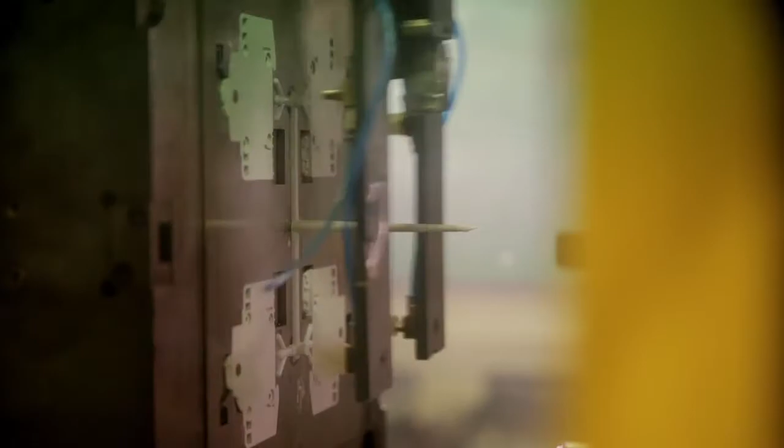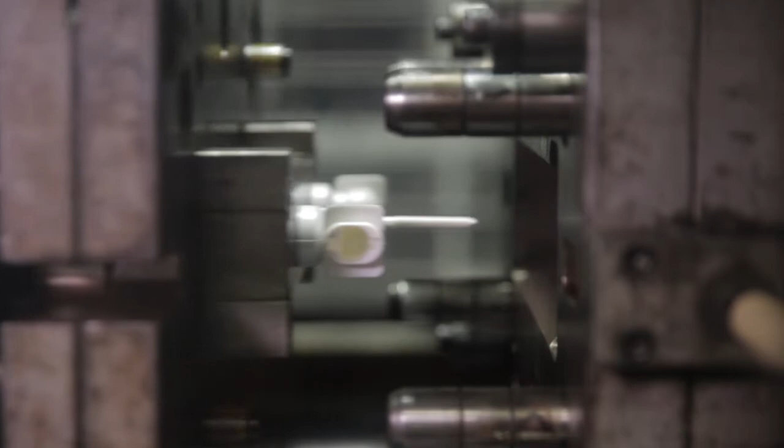General Industrial Controls, commonly known as GIC, was established 4 decades back in 1972. GIC is an ISO 9001:2008 and TS 16949 company. It manufactures world-class automation systems and injection molded plastic parts, and it has also got a world-class tooling activity.

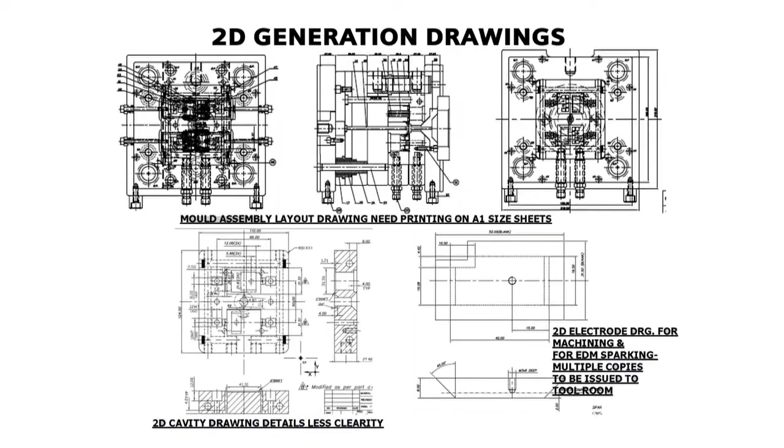In the initial years of manufacturing tools, we were using hand sketches drawn on paper, and later on, when the 2D platform came into existence, we started redrawing the sketches on 2D software on the screen. It was difficult for most of the people to understand the 3D aspects and the 3D intricacies of the mold design and the part design.

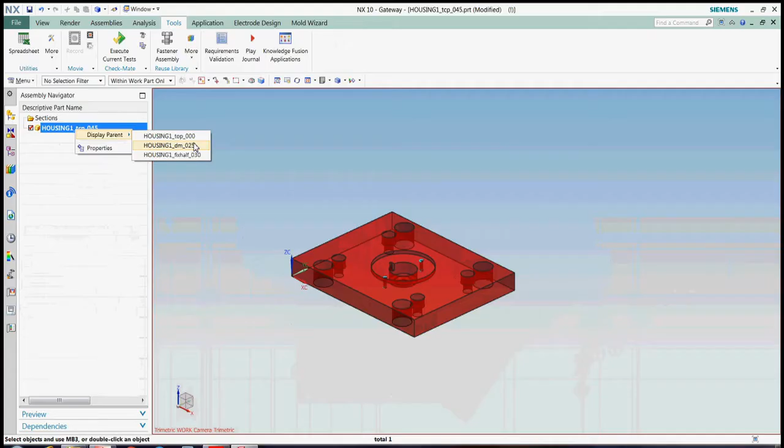The day we started using NX, we were very clear about the features of the component. This is the language of the tool engineer, which is very simple to understand. The designer is sharing his thoughts and the manufacturer can easily understand. So NX has made it very simple, and my total team has adopted it in very less time. Whenever we receive any RFQ from our customer, we make a feasibility study using Siemens NX software.

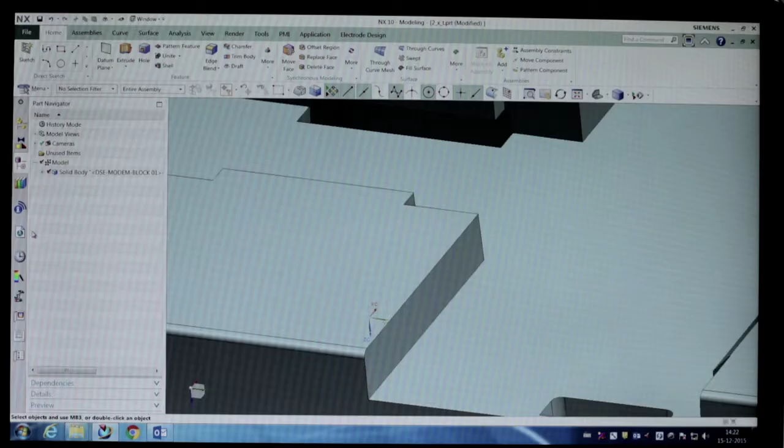NX has its own intelligence. It can analyze the part very easily. NX can do the analysis of the draft as well as the thickness. There are radii at different areas of plastic profiles where we need to know what type of liberty can be given on those radii so that it can be machined faster on 3D CNC milling machines.

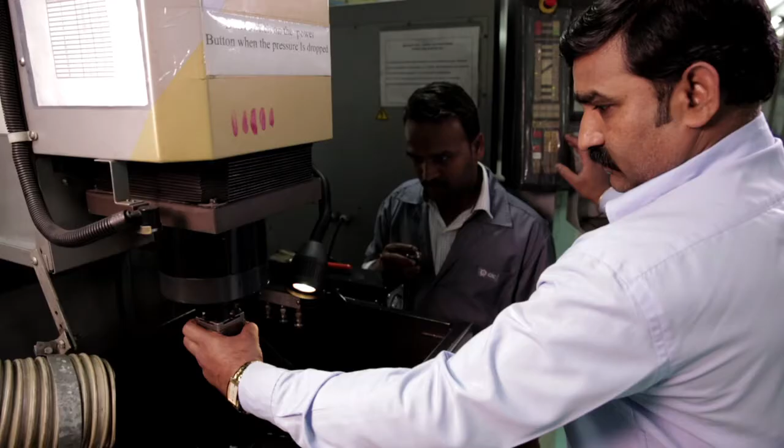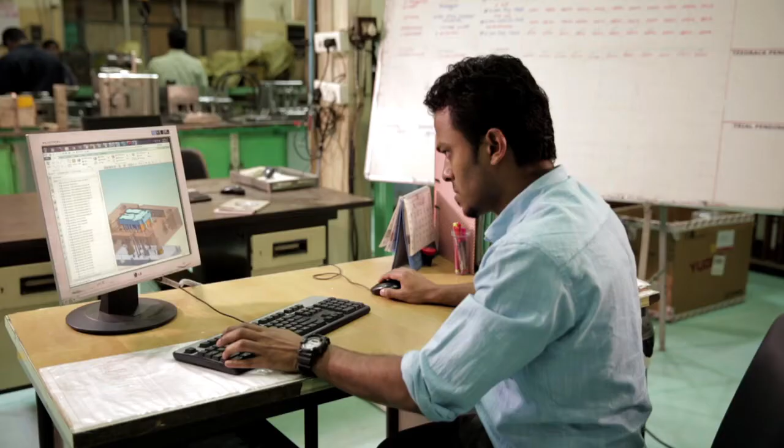There are many cross-functional teams like EDM, Wirecut and VMC. So after completion of the tool design, we can share that design with these teams and get their feedback. You can analyze the part even at the design stage, which can help in getting the final product even on a virtual platform. Being the first point of contact with the customer, I need to satisfy myself in terms of the quality of the mold. Response is another key factor which we need to give immediately, because people want the reply in 1 day's time.

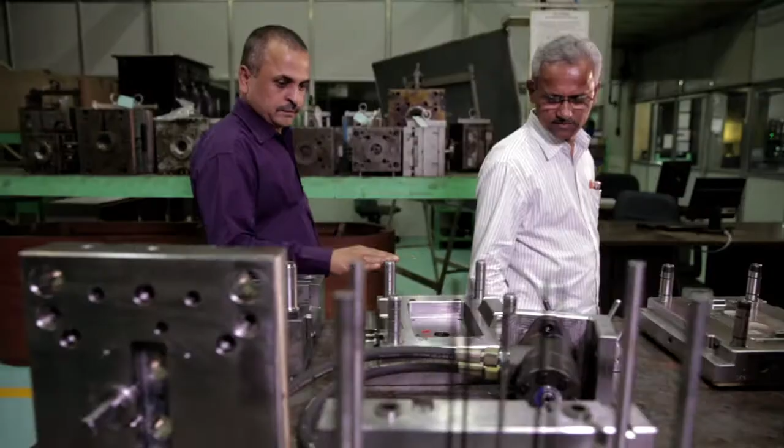With the implementation of Siemens NX Mold Wizard 3D software, both in design and in manufacturing stages, with the help of 3M software services, GIC has been able to reduce the communication time substantially. At the same time, the design cycle time has been reduced by 35%. I recommend NX to everybody because it is a very comfortable software which is helpful for the mold design as well as the product design. NX Mold Wizard has brought in a phenomenal change in the way the process of manufacturing tool design is now dealt with.